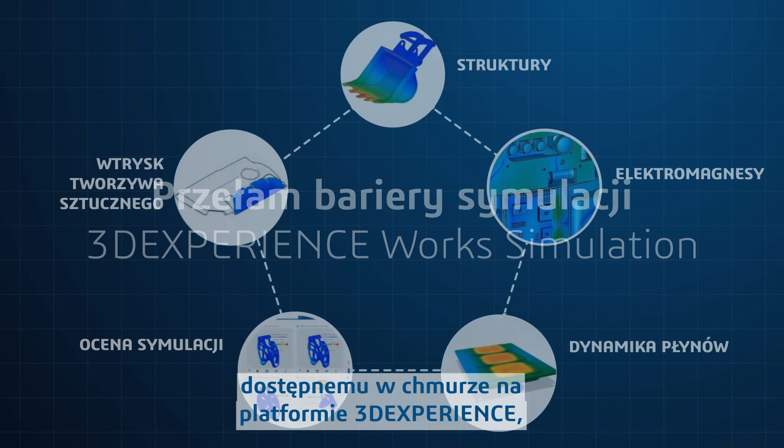The 3D Experience Works Simulation Portfolio provides comprehensive all-physics, all-scale simulation solutions for evaluating how your product will behave in real life. Available on the 3D Experience platform on the cloud, you can get the benefits of early virtual testing to assess product performance and quality with confidence. The included Simulia roles will guide your engineering decisions throughout the decision process, all without building expensive prototypes or relying on outsourcing.

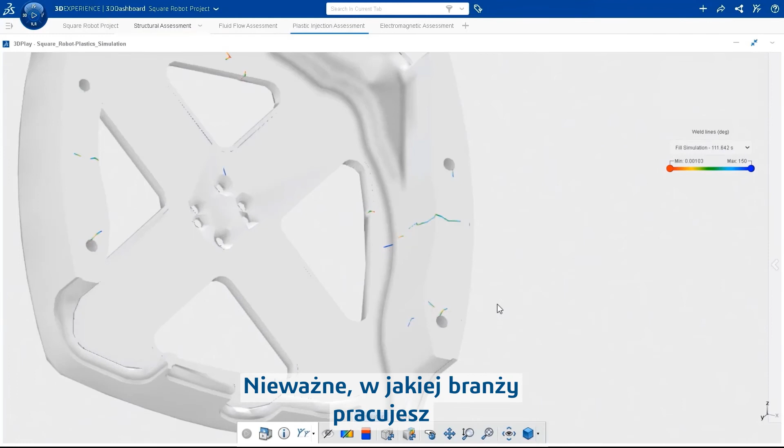No matter which industry you're working in or the size of your company, the 3D Experience portfolio can support your digital transformation and help you bring products to market faster and collaborate more effectively. So let's take a look at how this all works.

Our design is coming from Square Robot, an innovative company building systems for submerged oil and gas inspections. Such a system is designed for tough jobs in harsh environments. It has to be safe and reliable.

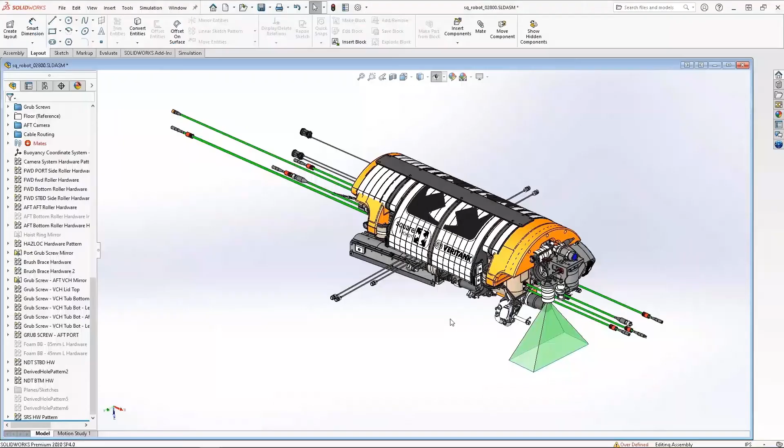Starting from SOLIDWORKS, you can connect to the 3D Experience platform using a unique and integrated workflow that enables you to easily save, manage, and share your design and simulation data in a secure cloud-based environment. Once the SOLIDWORKS data are saved to the 3D Experience platform, the beauty is that data can be seamlessly consumed by any application.

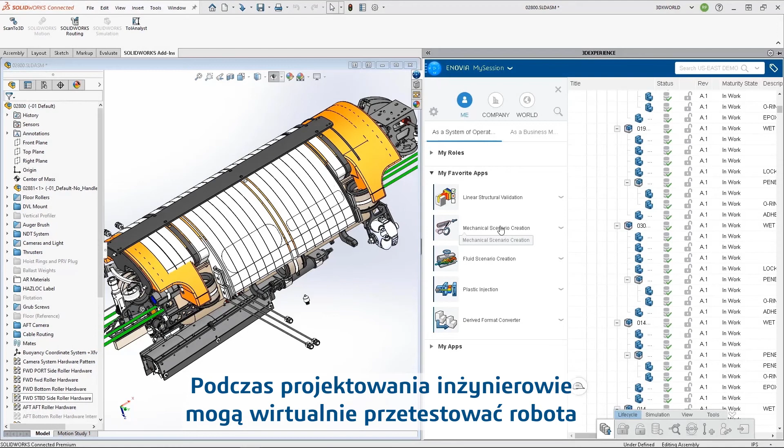While designing it, the engineers can virtually test the robot based on the severe requirements from the working environment for multiple scenarios. First, let's focus on the structural integrity of the subassembly and perform structural analysis to predict its response and strength against static and dynamic loads on it.

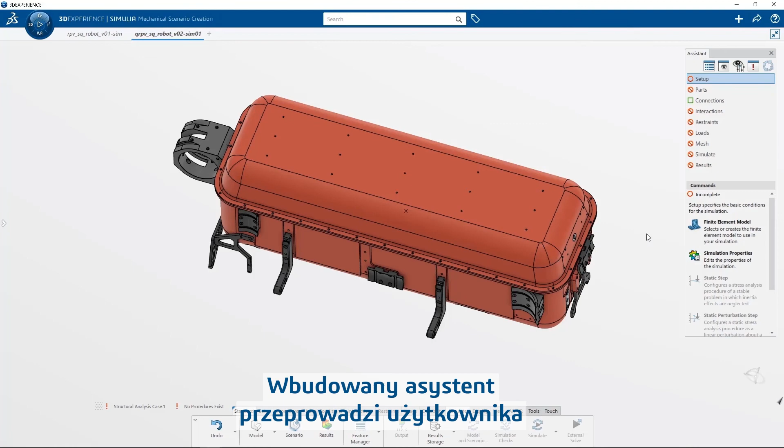You can easily select which components to focus on for the subassembly performance assessment. The built-in assistant walks you through the simulation setup to make it quick and easy, enabling all users to smoothly adopt the solution during their design process.

Automatic mesh generation speeds up the setup process with precise representation of the geometry. When needed, powerful manual meshing methods and comprehensive quality checks are available when local mesh modifications are desired.

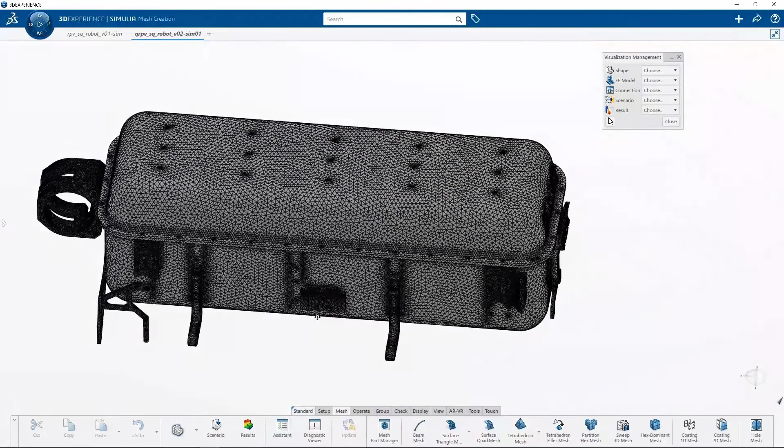To ensure the fidelity of your simulations, the tools for setting up the boundary conditions like a fixture and loads, along with defining connections, fasteners, and contact conditions, are available for different study types. In a few clicks, multiple bolts can be replicated from a single bolt setup to boost your productivity.

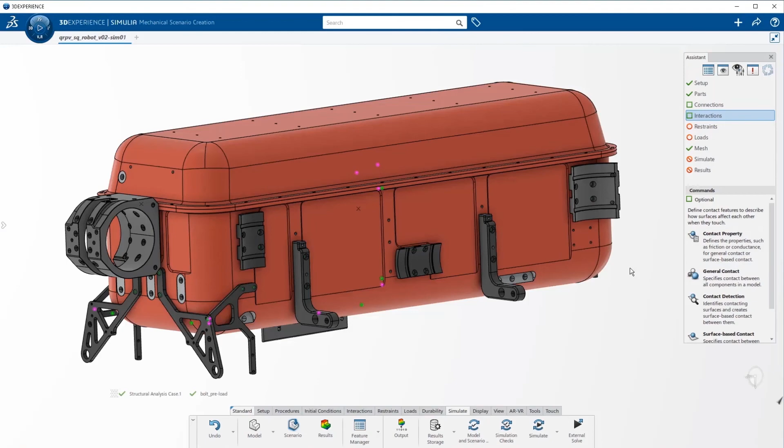Look how easy it is to set up contacts in a single click with a unique general contact capability. Loads, restraints, and fasteners are easily defined on the geometry itself, ensuring full associativity when design changes.

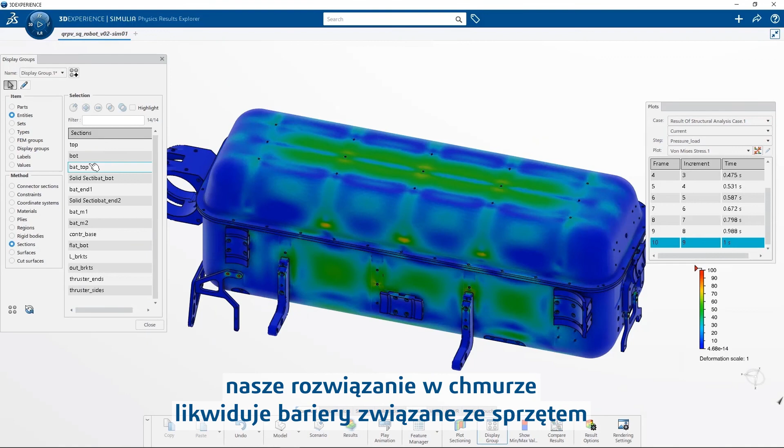And when it's time to solve the study, you can choose to run the analysis locally or on the cloud and take advantage of high-performance computing resources. Whatever your IT infrastructure is, our cloud solution removes hardware barriers, enabling all users to benefit from powerful virtual testing.

Once the simulation is complete, you can start reviewing the design behavior and understanding potential critical areas or overdimensioned areas. The deformation of the vessel will be reduced for stronger integrity. Let's see how stiffeners can help towards this goal.

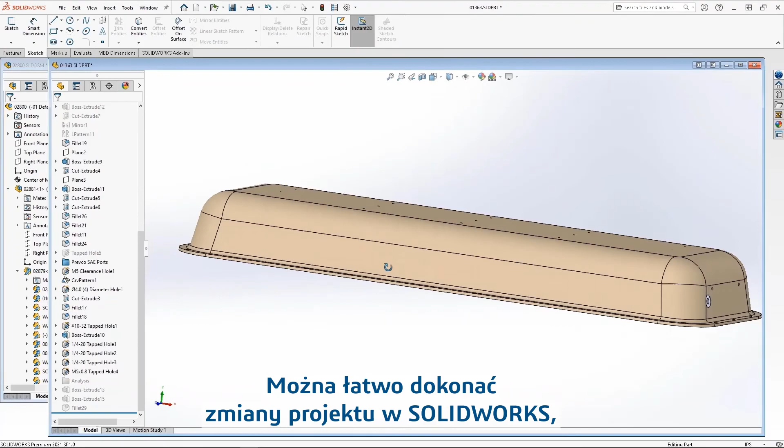You can easily make a design change in SOLIDWORKS, save it, and update simply the simulation models for an efficient what-if scenario. As simple as that, this is a true simulation-driven design experience. This design change definitely improves the stiffness of the cover design.

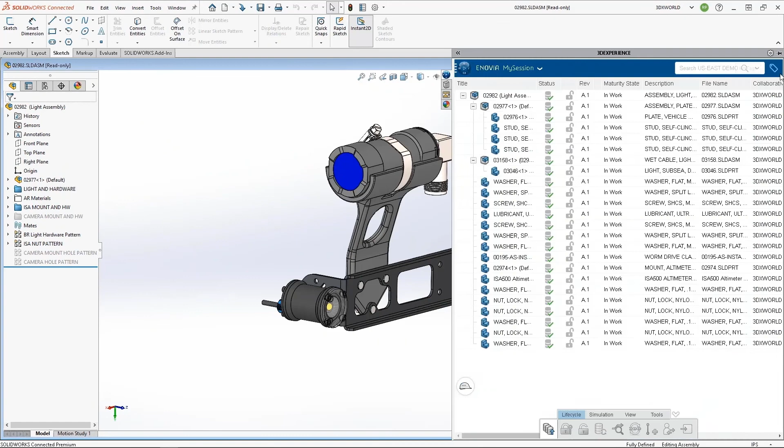One more step towards reliable design with 3D Experience. What about avoiding vibrations and related deformations? 3D Experience Works Simulation Solution offers a scalable simulation environment for all user profiles, from designer up to advanced engineers, and for all simulation scenarios.

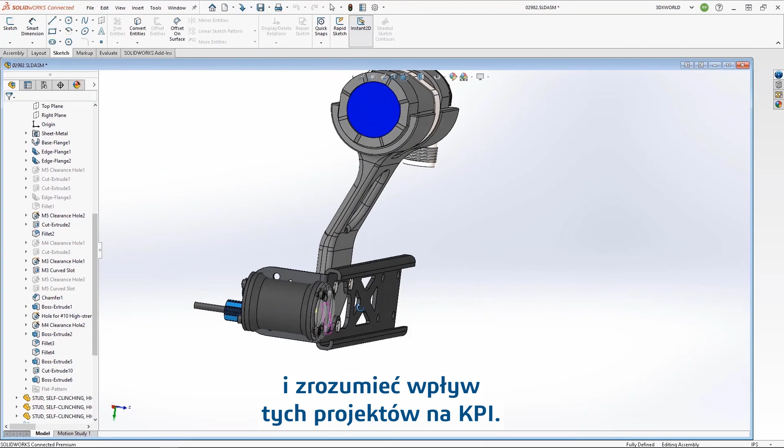With the same intuitive user interface, designers can assess the natural frequencies of the light assembly. From these baseline results, designers can easily modify the design and understand the impact of these designs on the KPIs. Improving product performance has never been easier.

The beauty of our solution is that the same user experience is offered in a unified multidisciplinary environment, irrespective of physics domains being explored. Another item of interest in the robot is the propeller assembly.

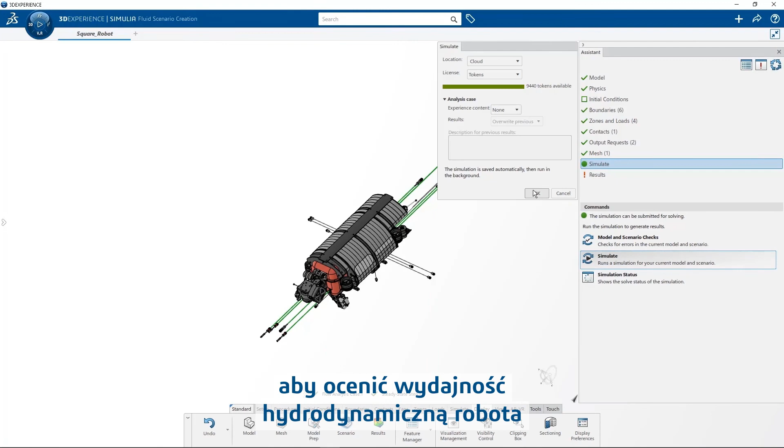You can easily set up and perform a fluid flow simulation with the same guided assistant to assess hydrodynamic performance of the robot submerged inside the petroleum storage tank.

While external fluid flow studies around the robot will provide forces and moments acting on the surface, one can also gain non-intuitive insights into flow fields around the assembly through high-quality visualizations.

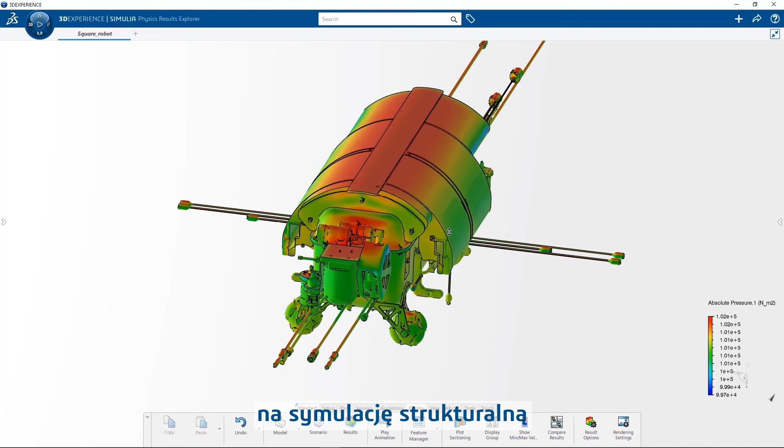You can take this a step further by mapping pressure data obtained from flow analysis onto a structural simulation to identify stability of the design to withstand fluid forces inside storage tanks.

3D Experience Works Simulation Portfolio also offers intuitive and designer-centric plastic injection simulation capabilities. Again, the same guided assistant and workflow with SOLIDWORKS for full associativity offer a digital continuity and a unique virtual testing environment for all users.

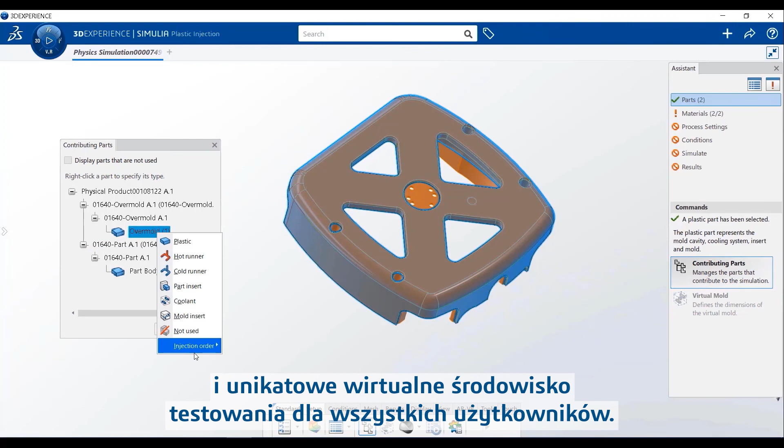Assign materials from a library of more than 4,000 plastic grades, specify your manufacturing process, and easily assign injection location points to get the assessment of the plastic injection faster than ever.

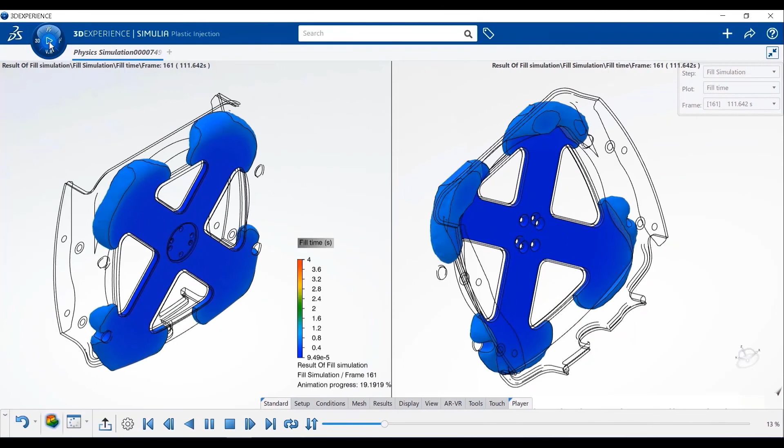During the design process, you can evaluate and improve plastic part and mold tooling designs by simulating the filling and packing process and the mold's cooling system. Collaborate with your peers and customers, leveraging simulation results as technical insights for your meetings using the web dashboards.

But the robot is nothing without its sensors. After all, the main function of the robot is to inspect the integrity of oil and gas tanks, and it needs a multitude of sensors for that purpose.

An electromagnetic antenna sensor can be used to detect small imperfections or irregularities in the tank that are difficult to detect with camera or ultrasound sensors. However, the harsh operating environment of the robot also poses challenges for the antenna design.

3DEXPERIENCE Works Simulation portfolio also offers a solution for the electromagnetic simulation for the antenna design, positioning, and performance evaluation once installed on the robot.

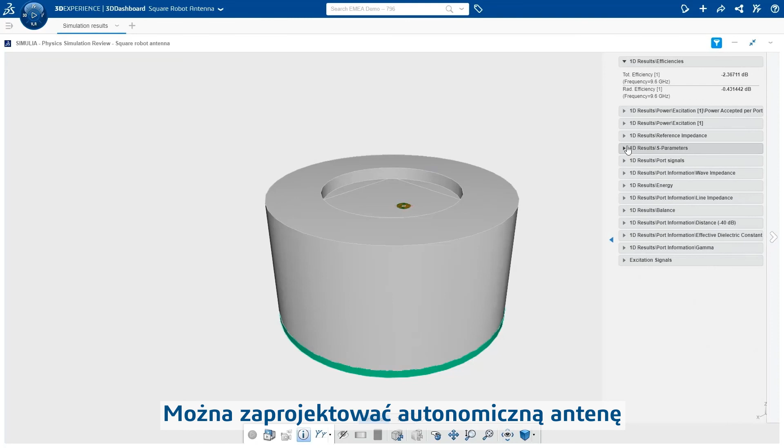You can design the standalone antenna and optimize its performance to the desired functional criteria, taking into account the operating environment and the various electromagnetic material properties of the oil or gas in which it needs to function.

Or you can collaborate with colleagues who are antenna design experts and can perform that task and then upload the results for your review to the 3DEXPERIENCE platform.

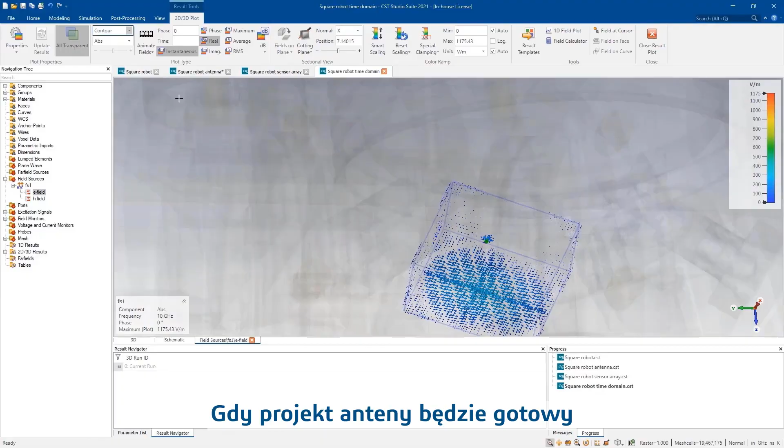Once the antenna design is ready, it can easily be integrated to the sensor array of the robot, and its installed performance can be verified.

Thanks to the guided workflows and intuitive user interface, setting up the meshing and simulation is available to all users, from designers to simulation experts.

The simulation portfolio offers a scalable, connected, and powerful solution for all designers and engineers, so they can assess product performance easier and faster than ever.

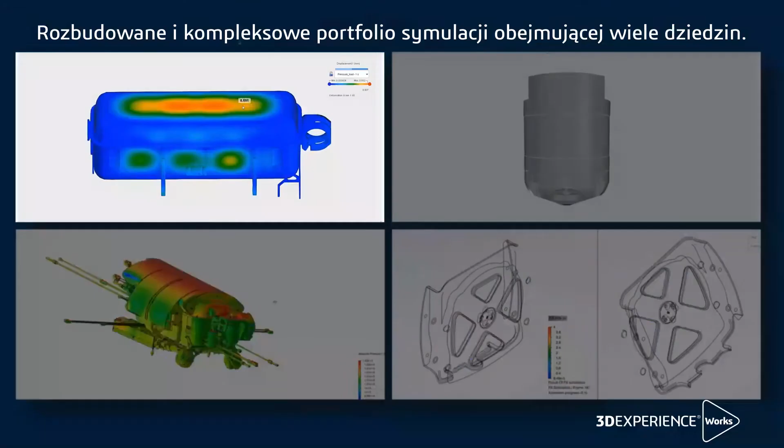With structural, fluid flow, plastic injection, and electromagnetic simulations, you are empowered to get the right technical insights you need for a new and innovative product development process. With Dassault Systèmes Solutions, you can streamline your design and simulation process today to produce the products of tomorrow.